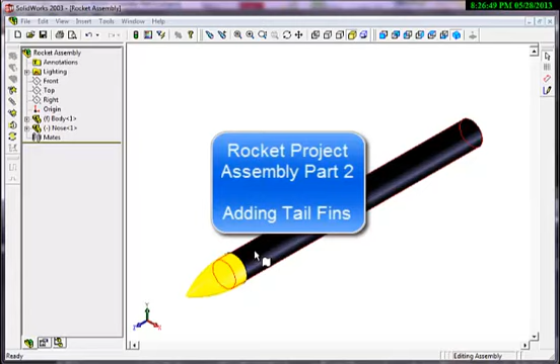This is Rocket Assembly Part 2. In Rocket Assembly Part 1, we assembled the body and the nose cone together, and now we need to add the 3 tail fins.

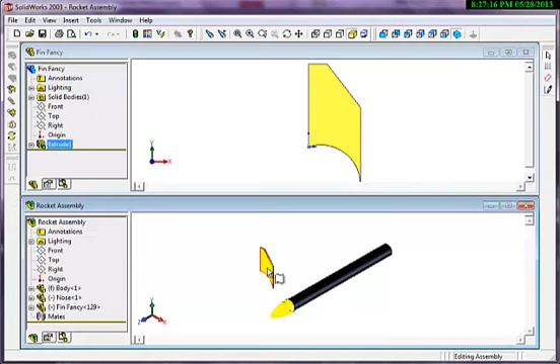So I've got my fin file open here. You'll notice that since the last video, I've fancied up my fins a little bit. What I'm going to do is tile the files, then drag the tail fin into the assembly. I don't need the tail fin file anymore, so I'll maximize the assembly view. To begin with, I'm just going to move the tail fin back a bit and rotate it to get it close to what we want.

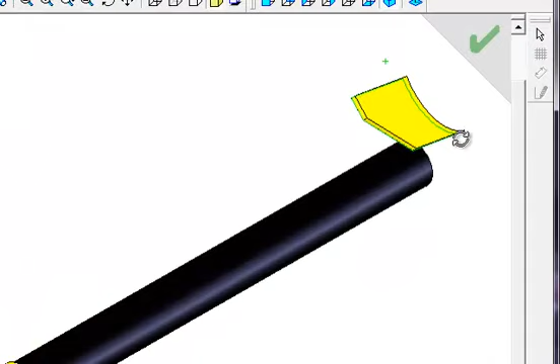Sometimes it helps to go to other views. If I look at it here, I can see that I'm very close. And then if I go to one of the side views and rotate it around, we've got it close enough for now.

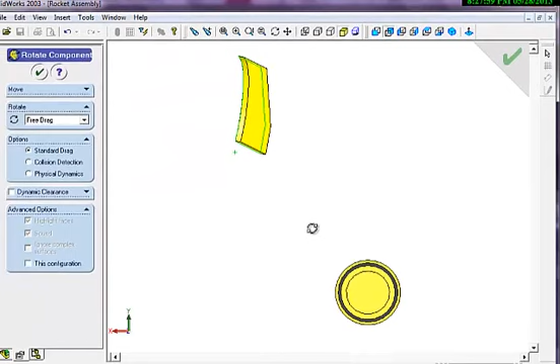What I'm going to do now is get it so that this face here is parallel to the axis of the cylinder. The way I'm going to do that is click on the plane. So if I just go through these planes here, I'll find one. That one is really what I want to align that surface with. So I'm going to click on the right plane.

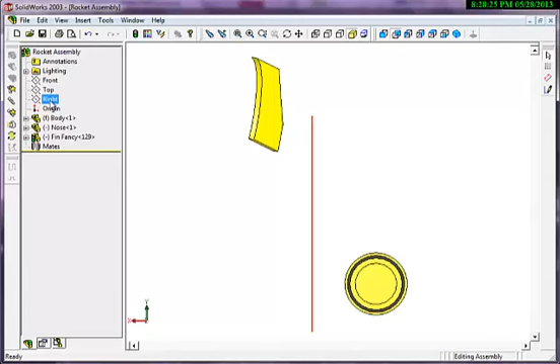I'm going to go to Mate, and I want it to go with this surface here. So I'm going to click on this surface, and it's going to be coincident, so I'll preview that. If I look at it from the back again, now this is straight, so that's achieved what I want. So I'm going to accept the mate.

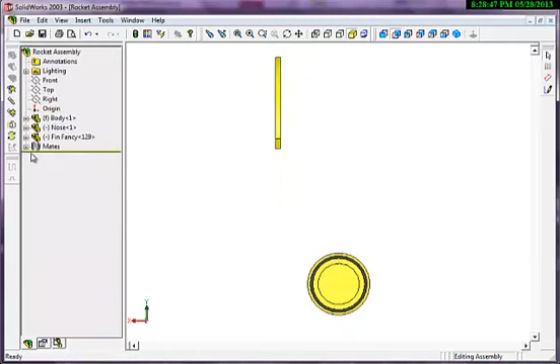Then I'm not going to use that mate anymore, so I'm going to right click and delete it. It will still keep its position, which is what I want.

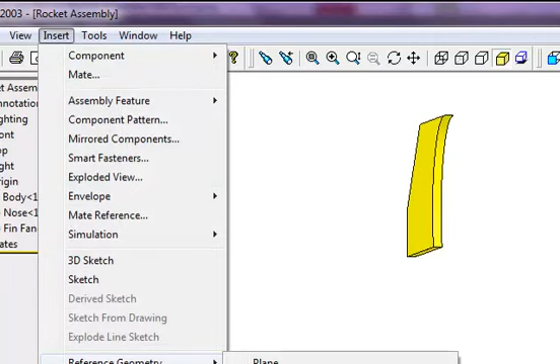So now what I want to try to do is align this edge with the axis of this cylinder. The best thing to do is insert some reference geometry. If I go to Insert, then Reference Geometry, and click on Axis, I've got different choices here. I'm going to use a cylindrical axis because I want the axis through this cone. Click on this one and select the cone, then I can say OK, and now I've got this axis in here that I'm going to be able to make use of.

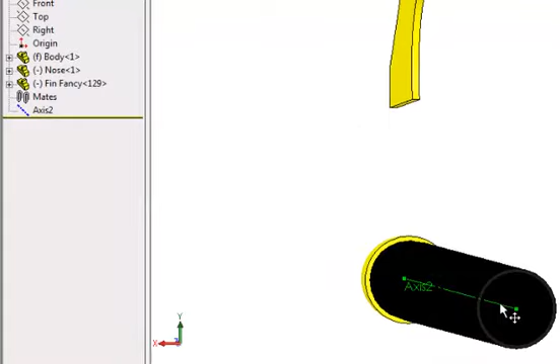So right now I've got that axis selected, so I can go to the mate, and I'm going to mate this edge with that axis. I'm going to do a preview, look at it from the back again, and now I've got the tail fin starting to get to the position that I want.

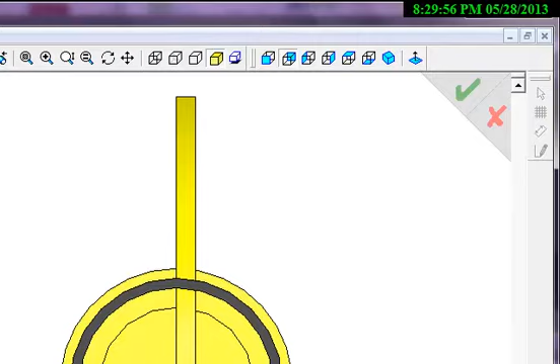What I need to do is shift it over half of the thickness of the tail fin. The tail fin, I believe, was 1/8 of an inch, so I need to shift it to the left 1/16 of an inch. So I'm going to accept that mate. Again, I'm not going to use that mate again, so I'm going to delete it. Otherwise, it's going to pin it in place and I won't be able to move it.

And now I'm going to use the move command. I'll click on it here. Now, there's a lot of different ways that you can go about getting this fin into place, and you should try to give some thought to it and see how you would go about doing it. This is one method, but there's many different approaches that you could use.

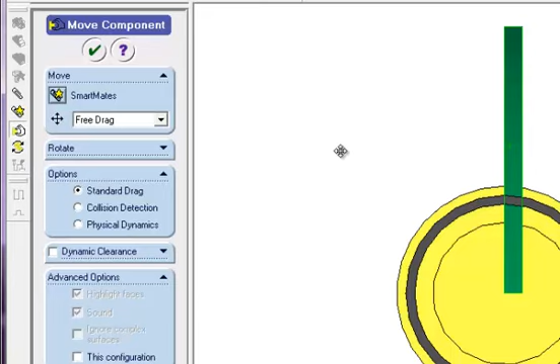So I'm going to move it by delta XYZ, and down here it shows me my positive XYZ directions. Moving to the left would be a positive X currently, so I'm going to type in 1/16 of an inch that I need to move it, and then don't forget to hit apply. Now that translation has been applied. So when we move something, it's called a translation.

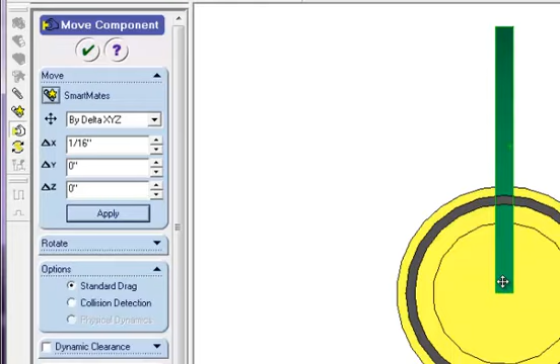And now what I want to do is use a tangential mate between the surface of the body and the underside of the fin. But to do that, if I do it in its current position, it might slide up or it might slide down.

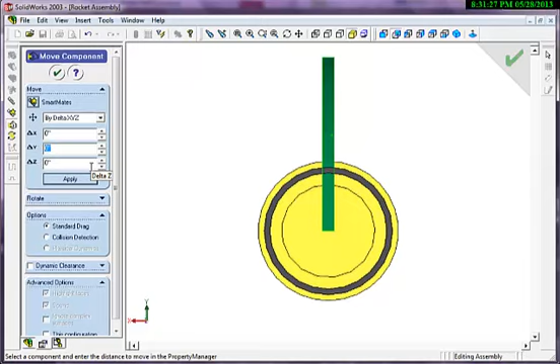So what I want to do is begin with, just to make life a little easier, I'm going to move my tail fin up a bit, say half an inch. I'm not really concerned about exactly how far. I'm going to apply it, putting it up closer to the top, so when I do my tangential mate, it'll slide up.

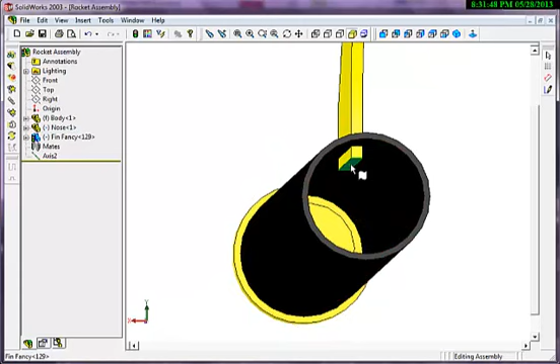I'm going to accept that, and now click on that underside surface, then do a mate, and click on the cone, or actually the cylinder, that I want to use. So now I can do that and preview it.

Now if I look at it from the back, I've got it in the right position. All I need to do now is slide it back. I can use this paper clip or thumbtack so that when I select a mate, I stay in here. So I've done that mate, it's there, but now I have the ability to do another mate.

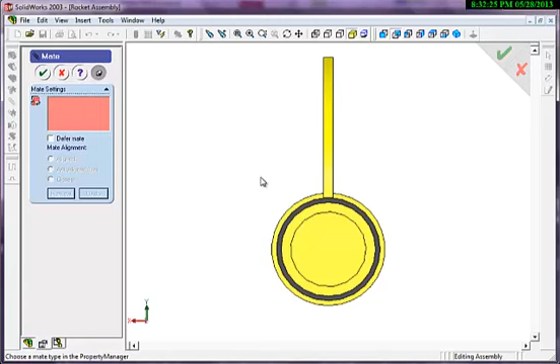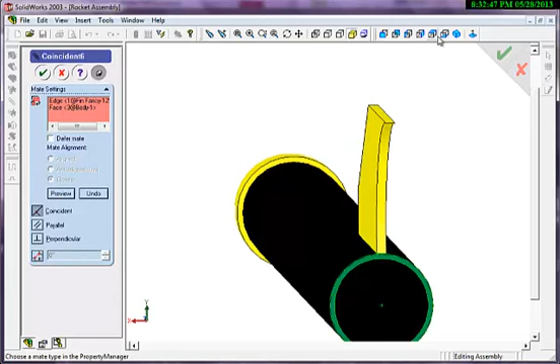Now I'll try selecting this surface, but I really want to use the bottom edge since this one is curved. Anything else won't work with this surface. So I want it to be coincident. I'll preview it, and now it slides back. Taking a look, it's looking pretty good, so I've got one tail fin set up and can accept my mates there.

Now what I need to do is get two more tail fins in. The best way to do that is use a circular array, or in SolidWorks those are called patterns.

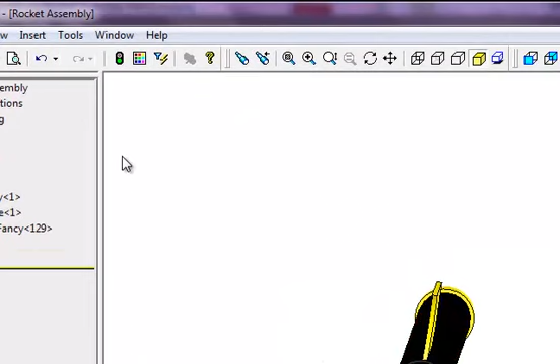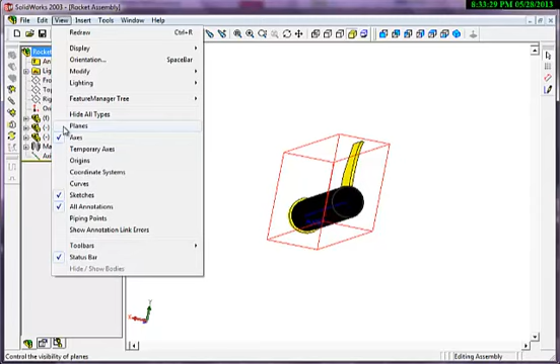I can't see that axis anymore, and I do want to use it this time. So I'm going to go up to View, and at any time you can turn on the view of axes, which shows all the axes. I could also turn on planes, but that would make it harder to see around the drawing right now, so I'll turn planes back off, and now we'll do our circular pattern.

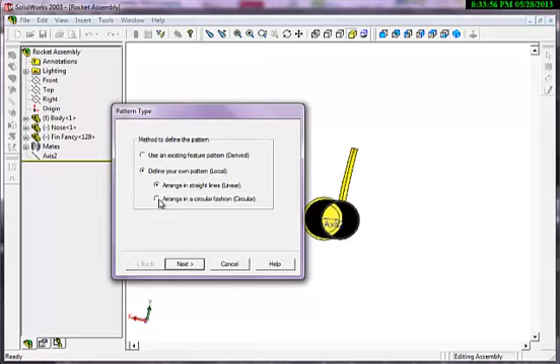I'm going to go up to Insert, then Component Pattern, and define my own pattern, so it's local. Then I want a circular pattern in this case, not linear. Then we can do Next.

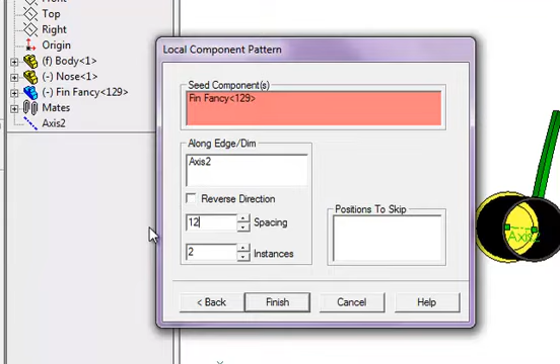My seed component is the original object I want to array, and along the edge I'm going to use the axis. I need to put in 3 of these, and I want them to go around the total 360 degrees, so 360 divided by 3 is 120 degrees. I'll put in 120, and I want 3 because it includes the original.

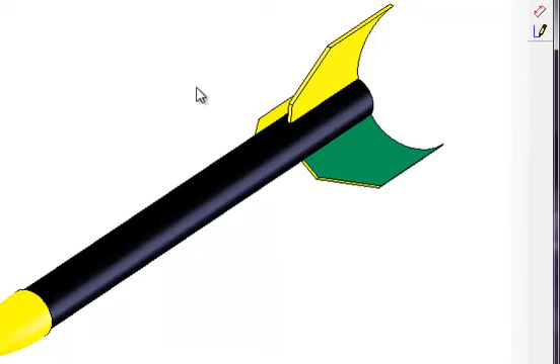So I can say Finish, and now I've got all of my tail fins in, and my assembly is looking good. Notice here it's put in a local pattern, and if I click on one of these, that's where it shows up, with my 2 fins inside that local pattern. My original fin in the tree is up here, along with my axes, and I think that's about all we need to cover for the rocket assembly part 2.

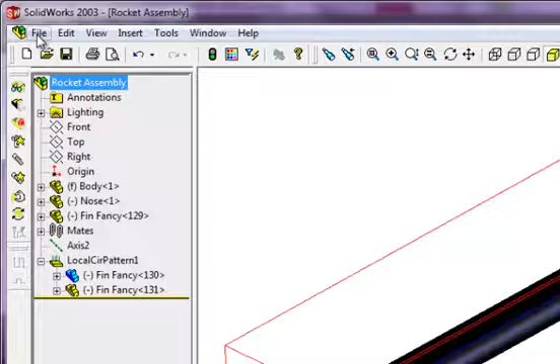So I'm going to File, Save As, and make sure that I've got this saved. Save it, and that's it for rocket assembly part 2.